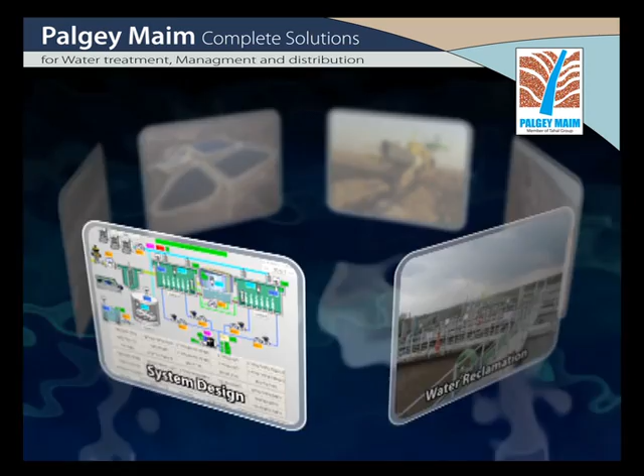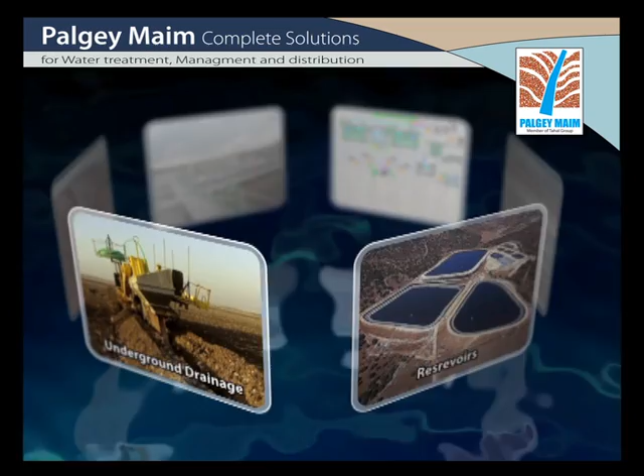Palgey-Maim Limited was founded in 1973. Since then, the company has been involved in flowing infrastructures covering a wide range of aspects: reclaiming effluents for irrigation, water supply systems, removal and treatment of wastewater, urban and agricultural drainage, and storing runoff water and wastewater in reservoirs. In all these fields, Palgey-Maim manages the initiation of system construction as well as operation and maintenance.

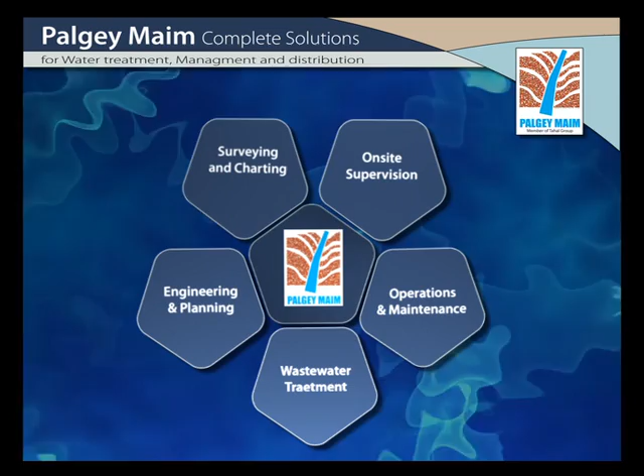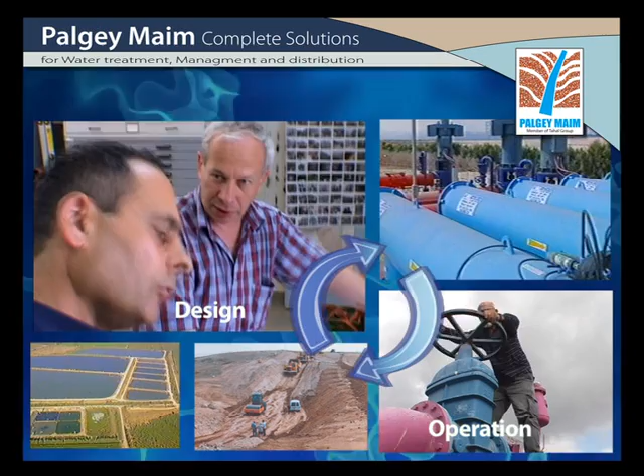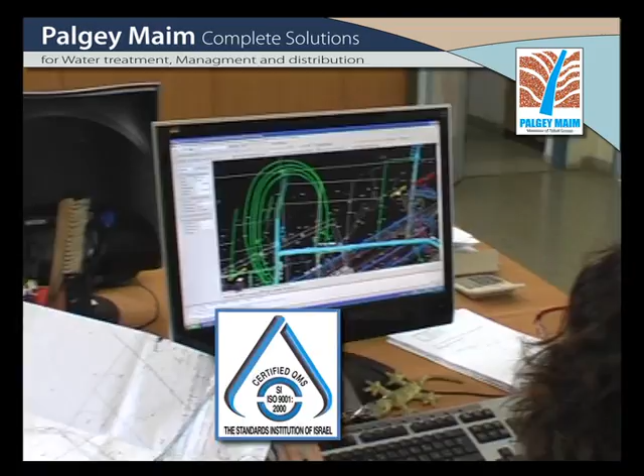This includes water and sewage systems, including wastewater treatment plants, engineering planning, on-site supervision, geodetic measurements, surveying, project management, operations, and maintenance. The large number of diverse fields in which Palgey-Maim works facilitates a steady stream of information among all its employees, in addition to mutual enrichment based on accumulated experience in each field. The company has ISO 9001 certification for all areas in which it works.

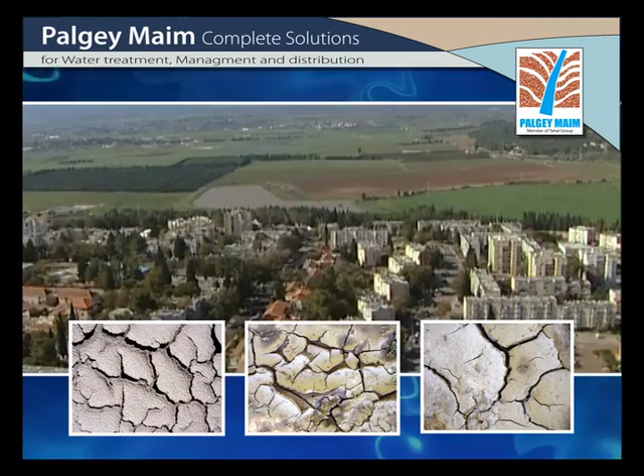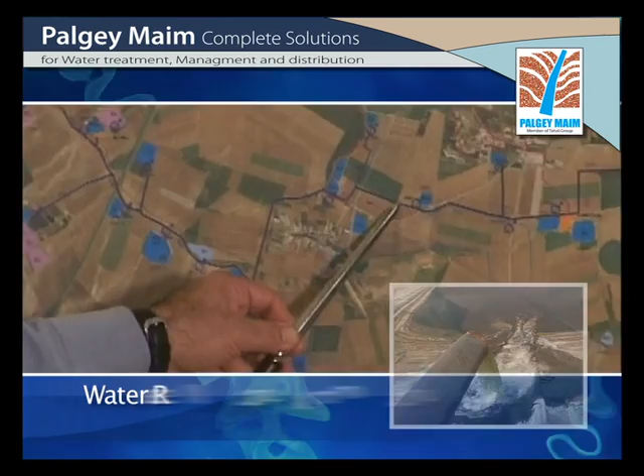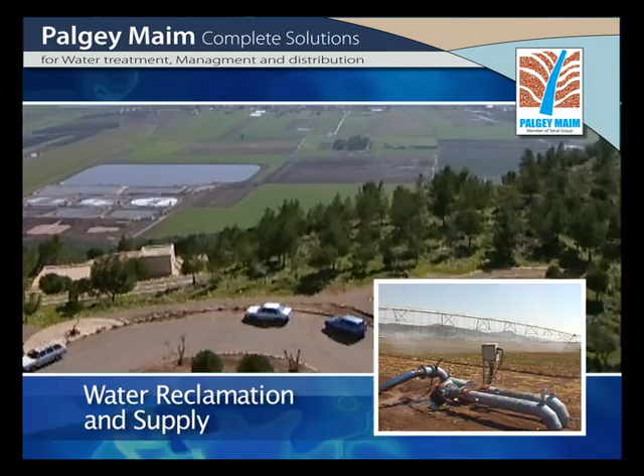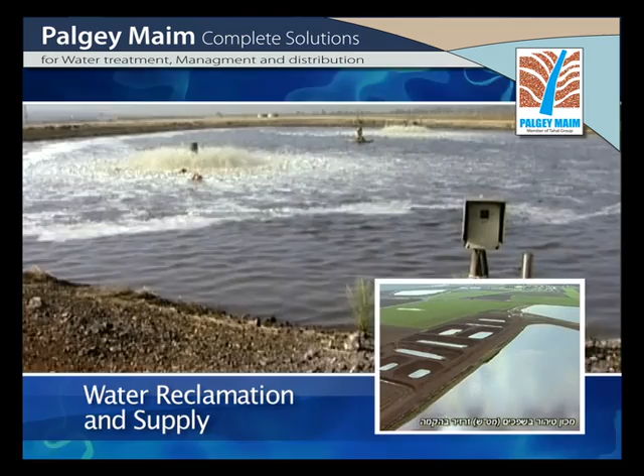The shortage of fresh drinking water and the need to find creative solutions to the treatment of municipal and agricultural wastewater led to the emergence of unique solutions integrating different technologies. There is also a need to improve wastewater quality and reclaim it for irrigation in separate systems while maintaining required quality. To solve the problem of pollution and take full advantage of purified effluents as a resource, Palgey-Maim has developed an alternative to exploit agricultural land and available reservoirs to create a wastewater treatment system different from the one proposed for crowded urban areas.

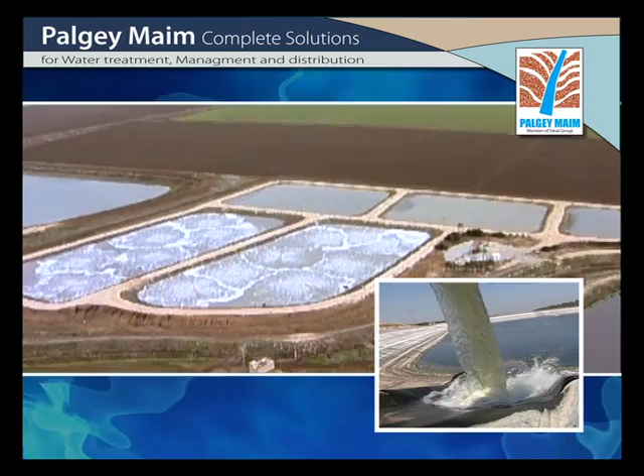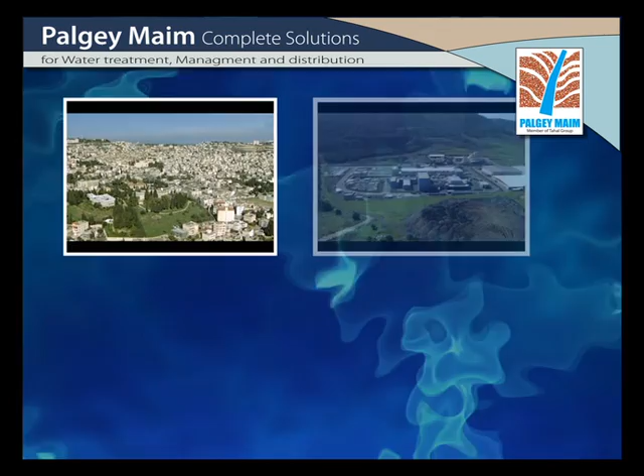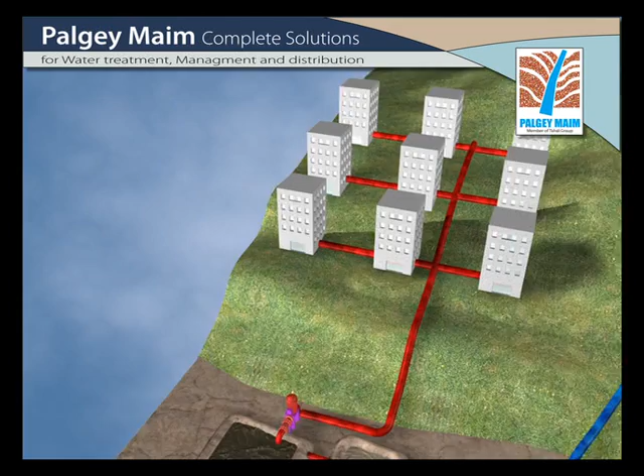Palgey-Maim's holistic approach to this problem led to the initiation of practicable research for investigating alternatives for wastewater treatment. The company worked to obtain all statutory permits, brought together all wastewater suppliers and potential consumers for the effluents, and constructed piping systems and pumping stations to collect the wastewater, as well as wastewater treatment plants, a system for discharging effluents, storage facilities, and furthered the supply of effluents.

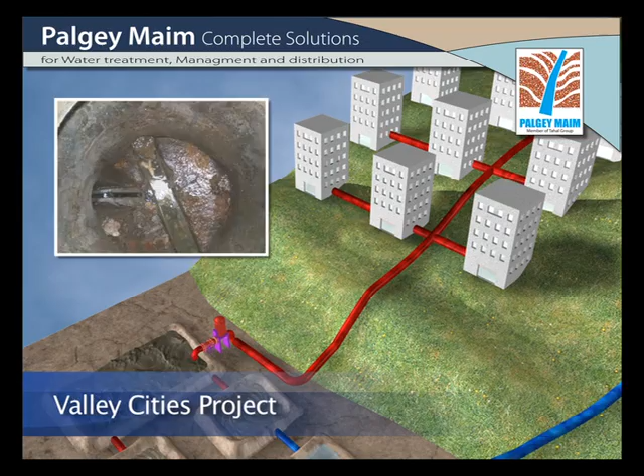In this way, the Valley Cities project for the purification and disposal of wastewater was established. Previously, wastewater from the cities, towns, and villages around the Jezreel Valley was allowed to flow by gravitation down into the valley, causing serious pollution and considerable nuisance in many instances. The project called for the laying of a pipeline covering 82 kilometers.

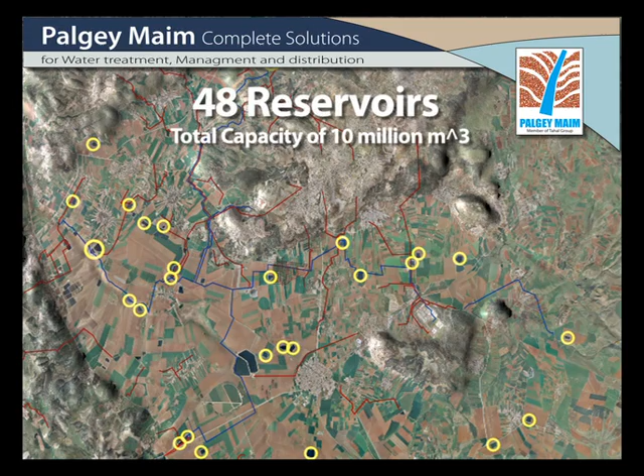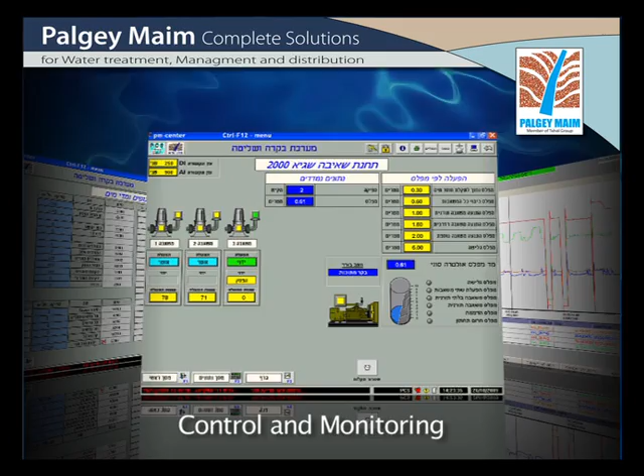The construction and modification of 48 existing reservoirs with a capacity of 10 million cubic meters. A system of remote control and monitoring was constructed to integrate wireless, cellular, and internet-based communication technologies, facilitating the system's operation and supply of water with service of the highest standards.

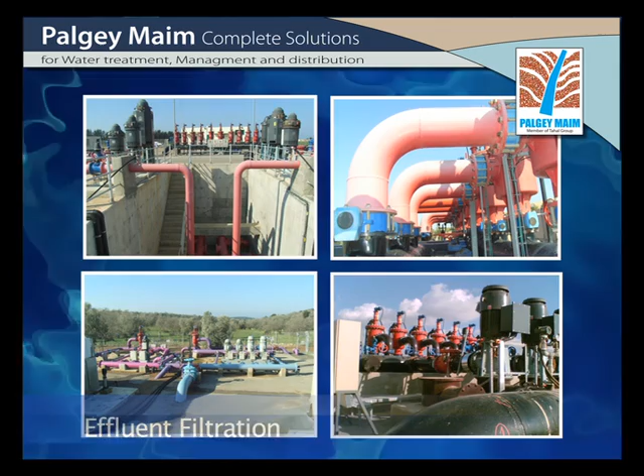When it comes to filtration, Palgey-Maim has acquired over many years knowledge based on a combination of field experience, together with research on adjusting filtration systems to meet the needs of irrigation technologies. The Water Reclamation Project supplies water to agricultural and industrial consumers, and for more than 10 years now, it has been managed and operated by a team from Palgey-Maim.

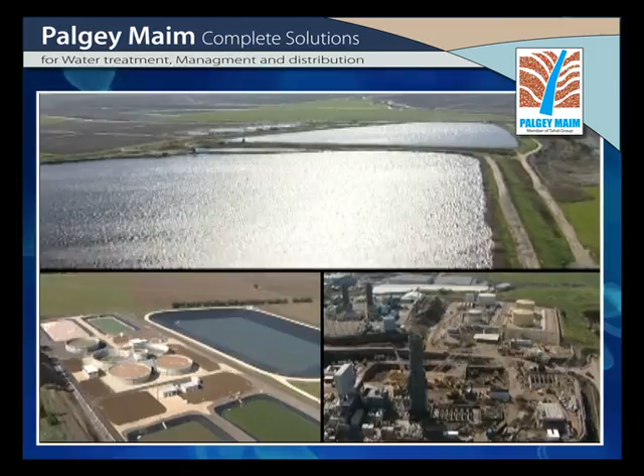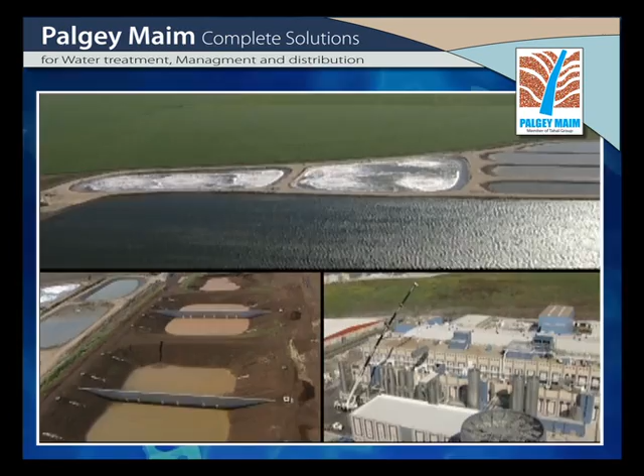The system takes into account the water quality demanded by various consumers, while applying a unique operating plan to fill the reservoirs that enables required qualities to be attained with optimal energy consumption.

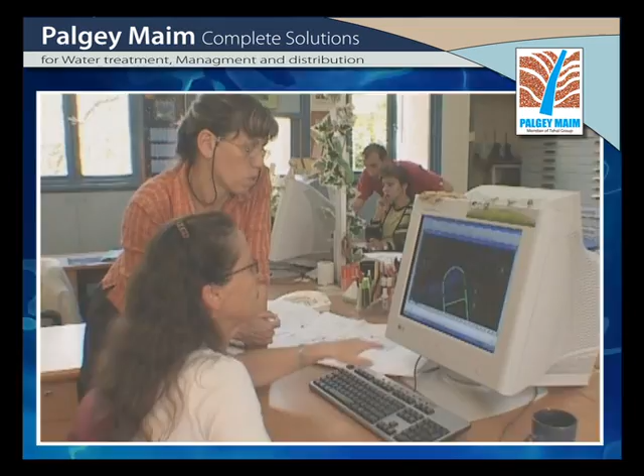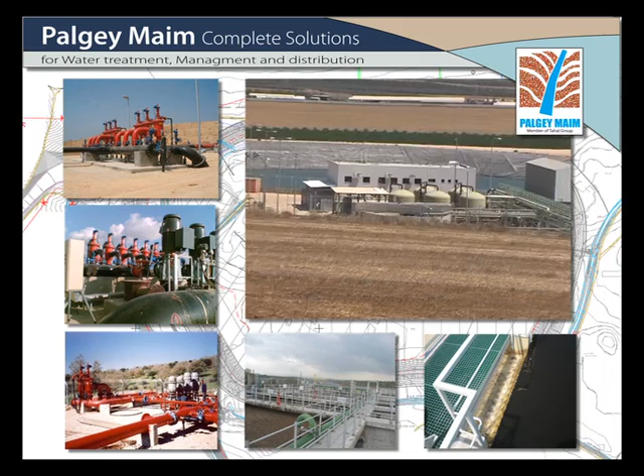Palgey-Maim is experienced in the planning and construction of water systems for irrigation covering tens of thousands of hectares. These systems include pumping systems, chlorination apparatus for gas or liquid, filtration systems, fertilizing systems, control and monitoring systems, main pipelines, and irrigation technologies for drip irrigation machines, sprinklers, and more.

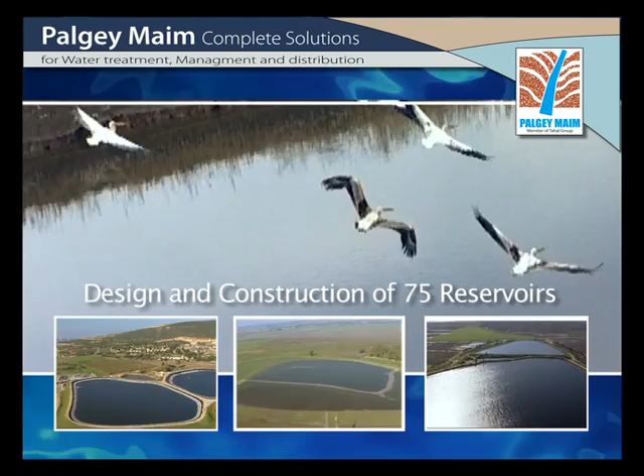Over the years, the company has planned and constructed 75 reservoirs with a total capacity of 60 million cubic meters. This experience also includes earthen reservoirs and the use of sealing technologies with plastic sheeting. The company has considerable experience adapting hydraulic installations to suit the reservoir's structure and applying accumulated knowledge in subterranean drainage.

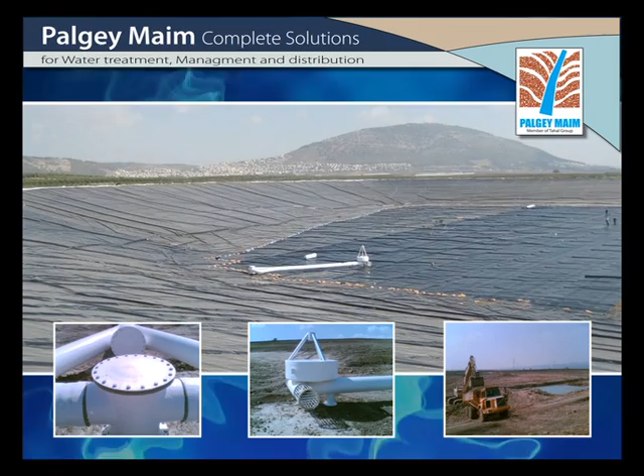As salinization of agricultural land in the Jezreel Valley increased to the point where soil structure was ruined and lands abandoned, Palgey-Maim launched a comprehensive systematic treatment plan to solve the problem. The following actions were taken: preliminary research was directed to identify the problems and formulate solutions.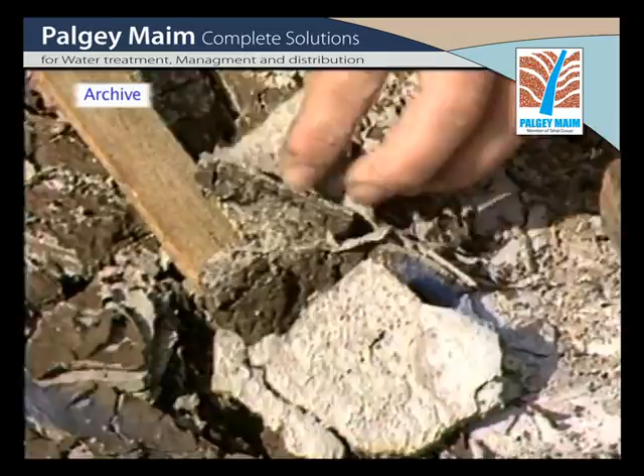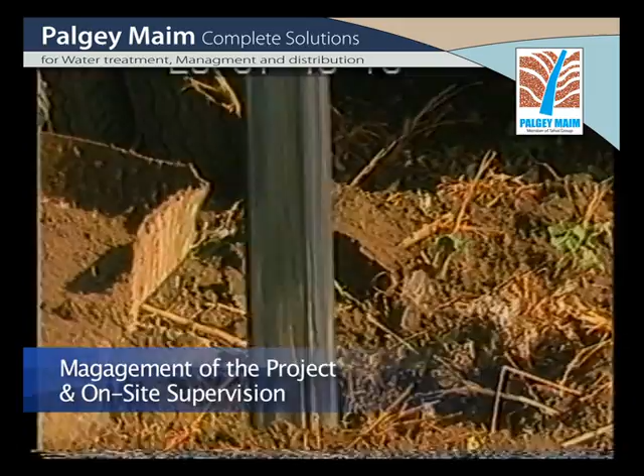Development and implementation of an integrated drainage model, including gravel wells and deep drainage; general and detailed planning of the devised solutions; management of the project's budget in cooperation with the Jewish National Fund, Ministry of Agriculture, water commissioners, local regional councils, farms, and similar groups; and on-site supervision of the work and measurements.

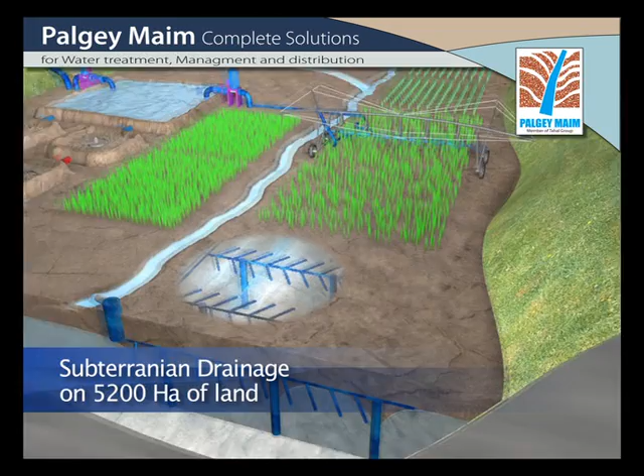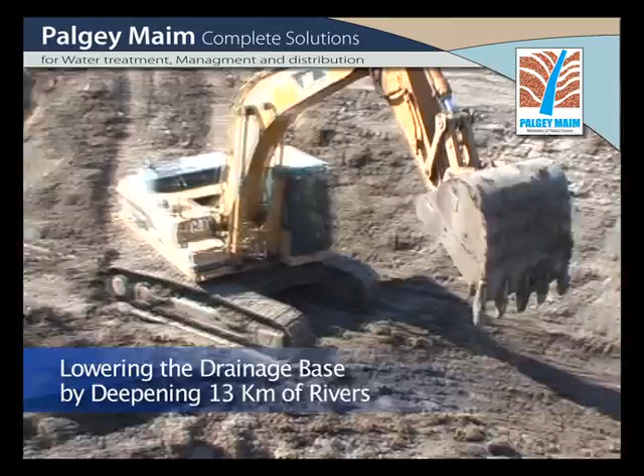As part of the project, subterranean drainage was carried out on approximately 5,200 hectares of land. With the aim of lowering the drainage base in the valley, the main riverbeds of the Kishon, Adashim, and Mizra rivers were rearranged and deepened along 13 kilometers. Moreover, the lake at Kfar Baruch was redesigned to serve as a side reservoir with gravitational inflow, while maintaining the embankment to restrain flooding effects.

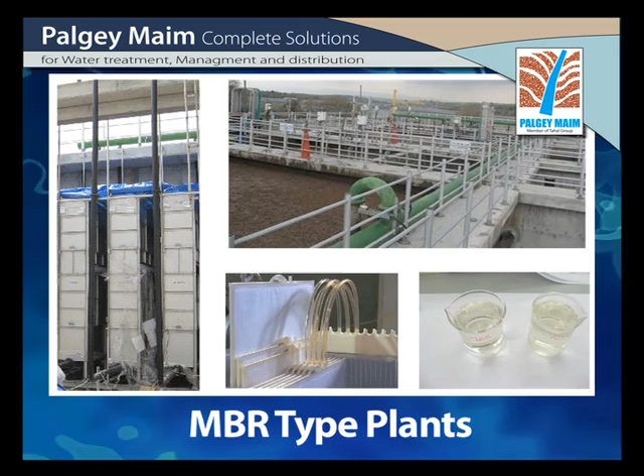Palgey-Maim specializes in the planning and operation of wastewater treatment plants, using many different technologies and exploiting knowledge obtained over 15 years of experience. Among the technologies employed are activated sludge, MBR, SBR, membrane installations, and extensive plants.

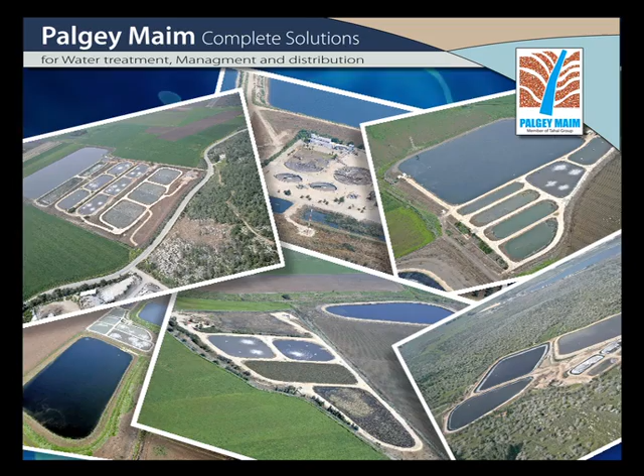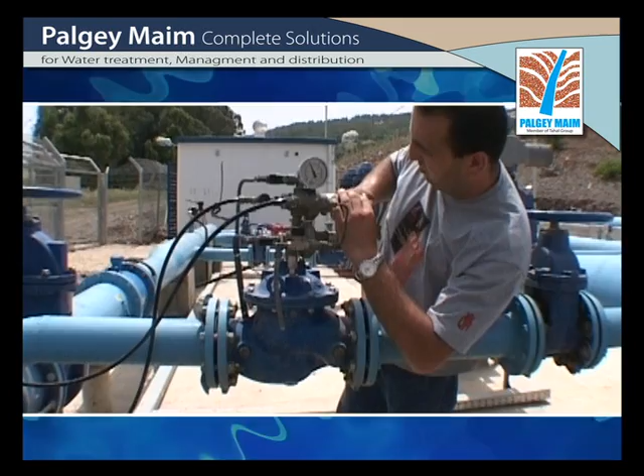Up until now, the company has initiated and managed the construction of 20 wastewater treatment plants and currently operates 14 installations using various technologies, in addition to 200 pumping stations. The plant's operation includes process engineering and technicians' work at the plant. Palgey-Maim has 2 specialized laboratories for carrying out chemical, biological, and microbiological tests of the wastewater.

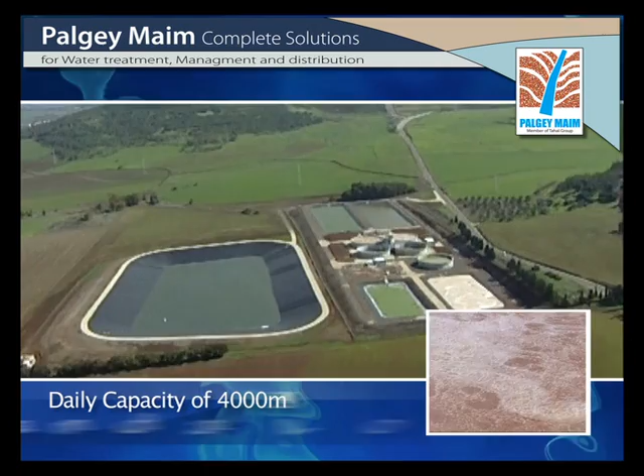Palgey-Maim has gained unique experience operating a plant for treating wastewater originating from the food industry, Tanuva. The plant, operated with SBR technology for treatment, has a daily capacity of 4,000 cubic meters and a load of 3,000 milligrams per liter COD. After treatment, the water is supplied for use in agricultural irrigation.

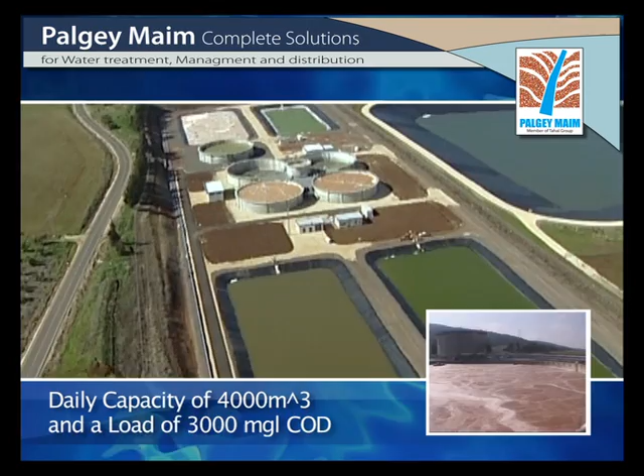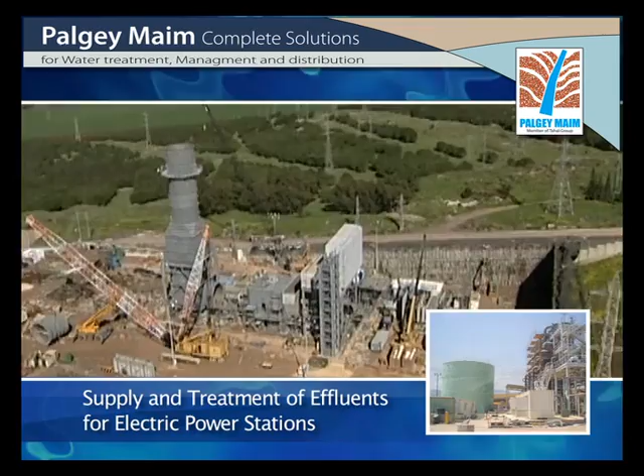Palgey-Maim supplies and operates a system for the supply of effluents to power stations, Alon Tabor and Gezer, run by the Israel Electric Corporation. At these power stations, a special technology is used to upgrade and soften the effluents in volumes of up to 1,000 cubic meters per hour.

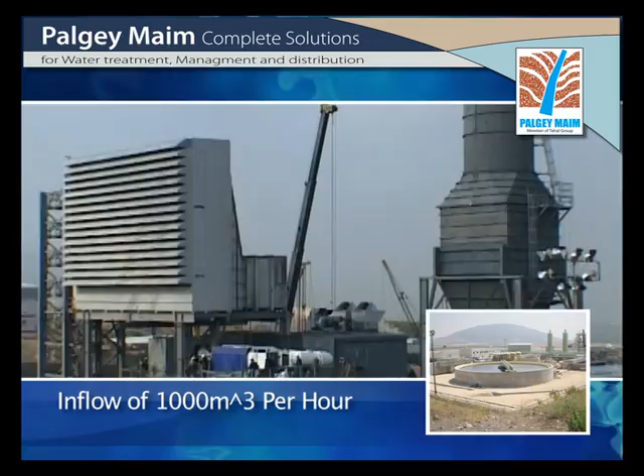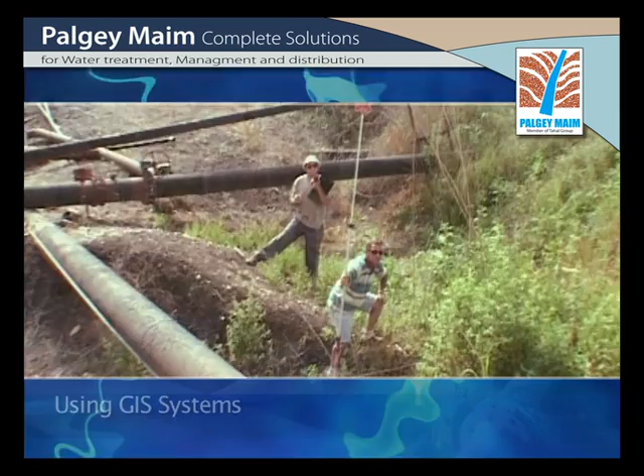One of Palgey-Maim's sections engages in measurements and planning roads while using GIS systems led by a qualified surveyor. In the field of electricity, the company provides services for the planning and supervision of electrical systems and specializes in water installations, wastewater plants, and main infrastructures.

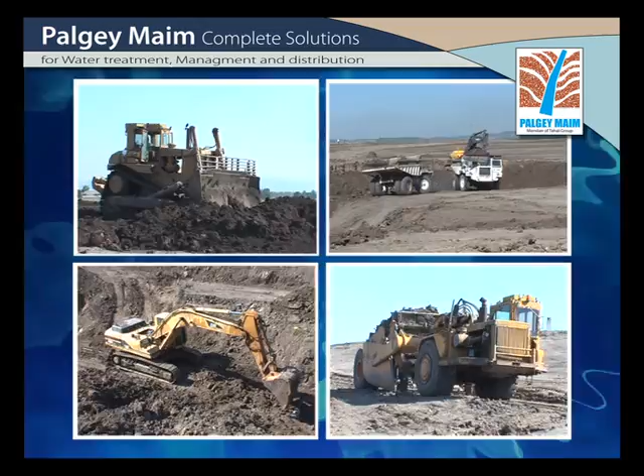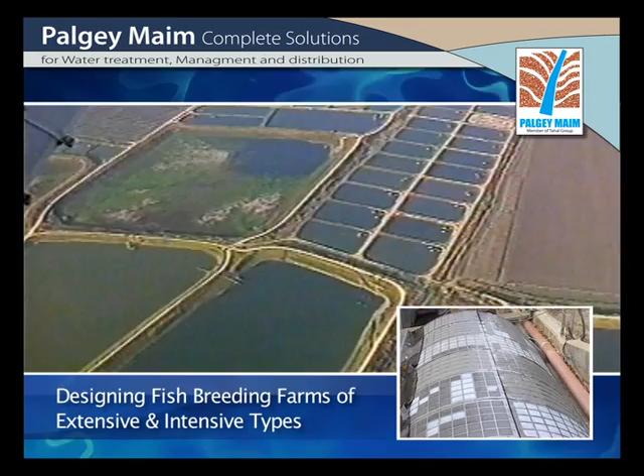The company has gained considerable experience in the planning and construction of fish breeding ponds using both extensive and intensive technologies, including reservoirs, storage ponds, fish harvesting methods, feeding systems, and similar features.

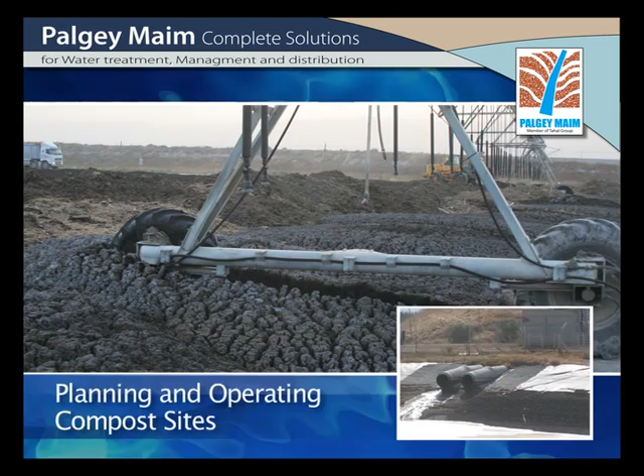Palgey-Maim has designed systems for the collection and separation of cow manure, treatment of wastewater from milking parlors, walkways, manure drying systems, and additional elements. The planning also includes compost sites, such as the Amakim compost site for the treatment of 150,000 cubic meters of dung per year, and the Sde Eliyahu compost site.